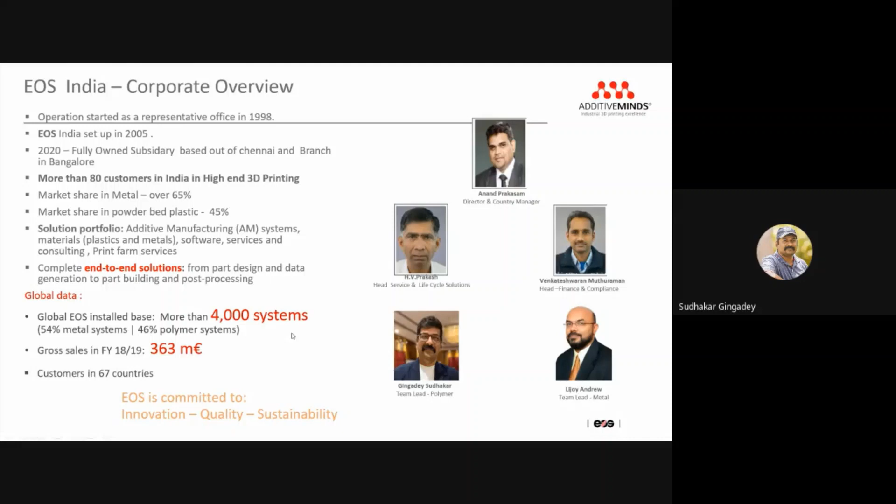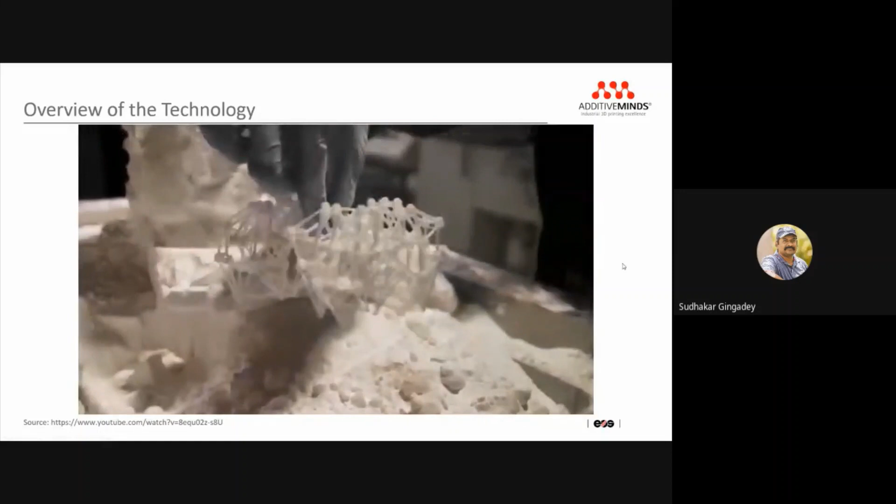So just to give you a small video about 3D printing, it's a small thing. I don't know whether you've seen these systems videos earlier. It is done as a layer by layer method. I think there are a few sessions from now, earlier sessions you must have had about what 3D printing is and how it's done, so I don't want to take you into those areas, just to show you how this works.

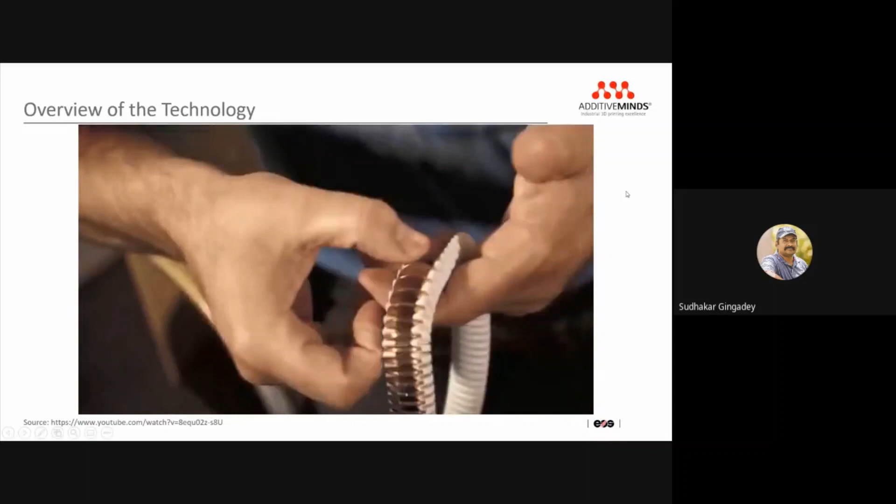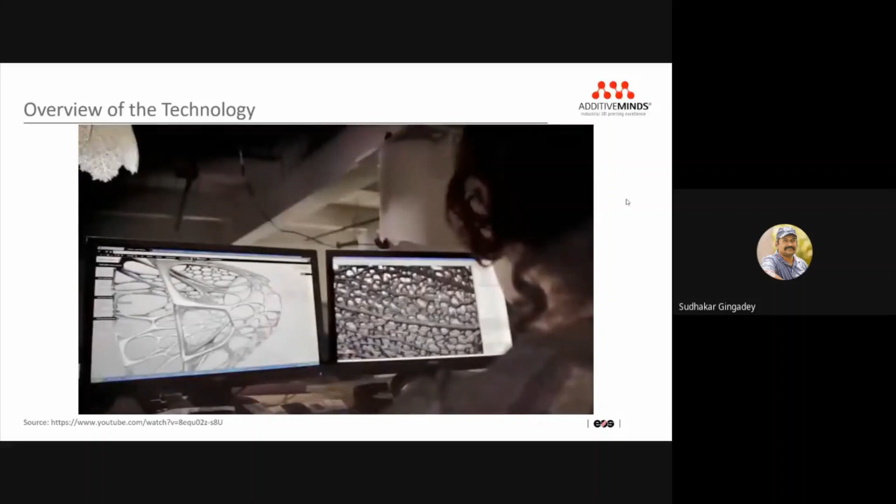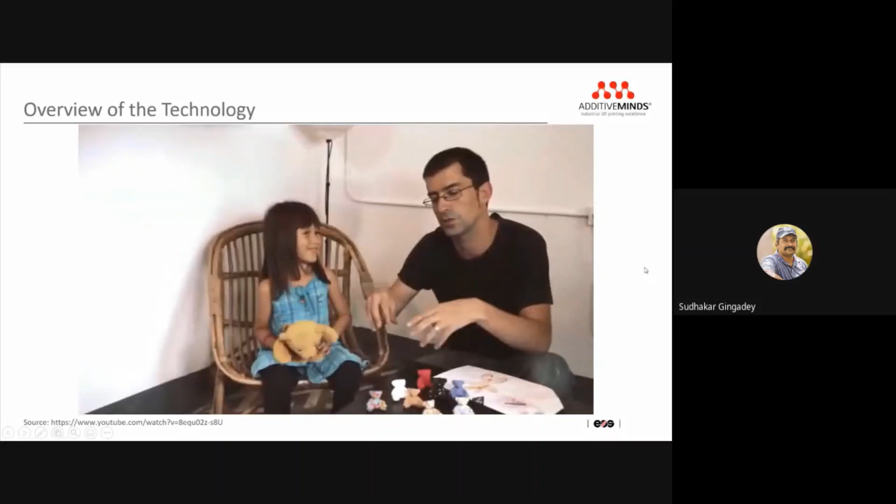It is something like designs which are not possible with conventional methods can be done with this. The design freedom is so high that whatever you finally have in your mind and you design it, you can just print it and get the 3D model intact. So there are no design constraints for the designers. The designer can have whatever he has in mind, and however small the issues, he can sort them out and print them. So here it is free of design.

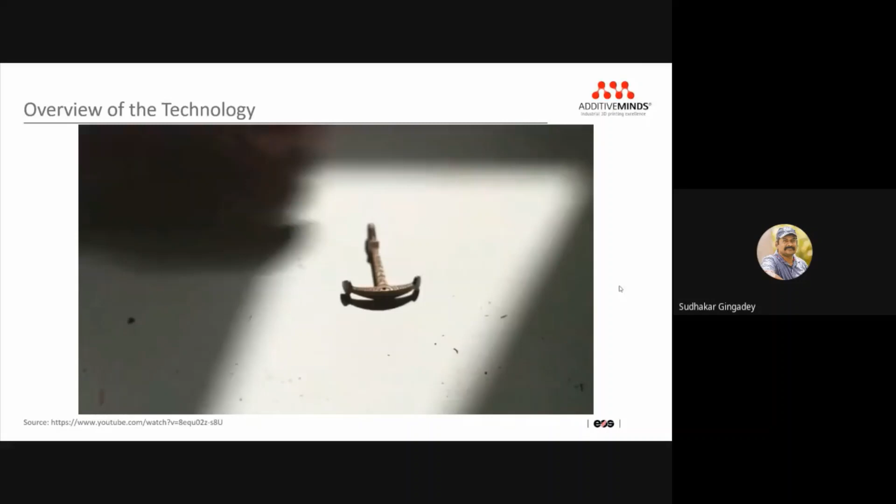That is something which is a stronger point that 3D printing has. So with that note, I hope everyone knows about 3D printing. I don't want to get into too much of that, what is 3D printing, all that stuff. So coming into today's topic, part screening and DFAM, or it's called design for additive manufacturing.

So for this, what is the application that you need to have? For example, why do we need this? Basically, what does part screening or DFAM look like? So it is basically, you have a car. In the car, there are so many parts out there. So we need to know which of these parts will be good enough for additive manufacturing.

There are so many parts in that - machine parts, casted parts, formed parts, plastic parts, metal parts, rubber parts. There are so many things in that. So out of so many thousands of parts, how do we identify what parts would be best suitable for additive manufacturing?

Okay, it doesn't only stop there. You need to know what the focus area is to understand what parts you need to bring in. It's not that alone - you also have to give some value addition to that. That means you need to understand what possibilities it can have, and then how to improve them. For example, you can improve the process, improve the assembly, improve the design. So there are so many things that you can improve, and all that has to be done.

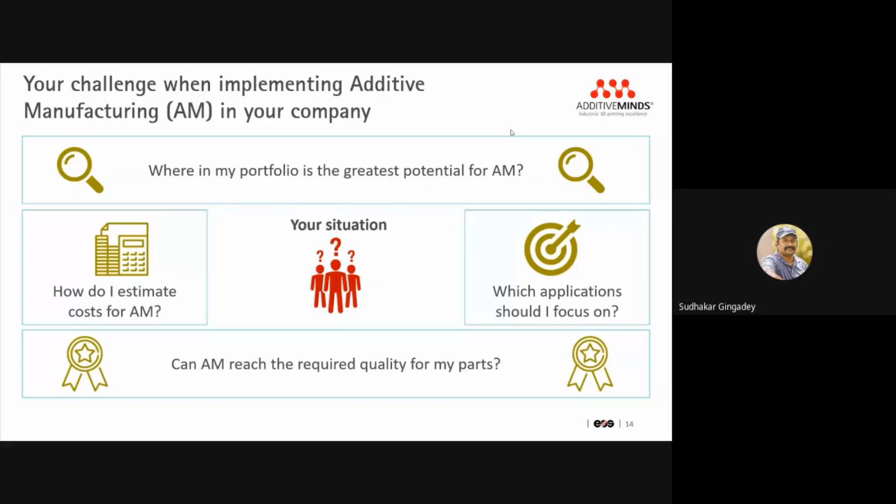The quality issues are being resolved, and the major thing is they are getting the parts at a high quality. Can additive manufacturing give that kind of quality? So these are all the challenges that you are going to face.

So how to implement or how to get optimal results? This is where we have something called the part screening and DFAM course, which is actually a 4-day program, but we're giving you a snapshot within 1 to 1.5 hours. We have a program wherein we'll have a set of people, bring in the parts, explain the concept, and then work with you. It's kind of a workshop, more of an interactive session.

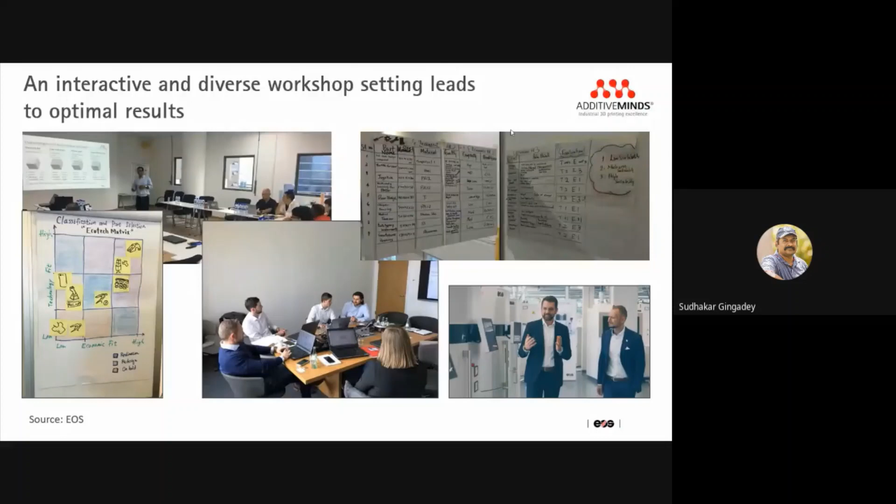So how will this session or workshop work? What are the major things that will be covered? There are two questions in front of us.

One is: what is the application that I have to use? Like, for example, metal or polymer, or rubber material, or casting. What is that application we have to find? The second question is to develop your application - how to improve, or what is the value add that I'm going to get from those parts which I have identified. There are steps you can do, which is a 3-step process.

The first step is basically part screening. The second step is DFAM, and the final is part printing of the part. So it's just 3 steps, and you can get to know what the final product is going to be.

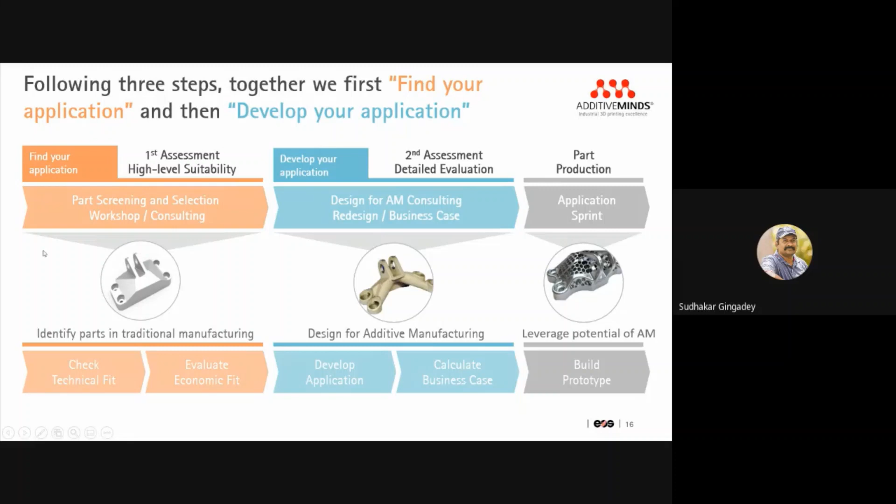Let's take the first step, which is the part screening and selection process. Here you can see there are 2 more things drilled down: the technical fit and the economical fit. What is the technical fit?

We are going one step further, trying to see what part screening we are going to use to select a part. For example, I've taken a steering wheel in my hand. So what am I going to do with that? How do I make sure that steering wheel is a good part for additive manufacturing, or is it good for conventional manufacturing?

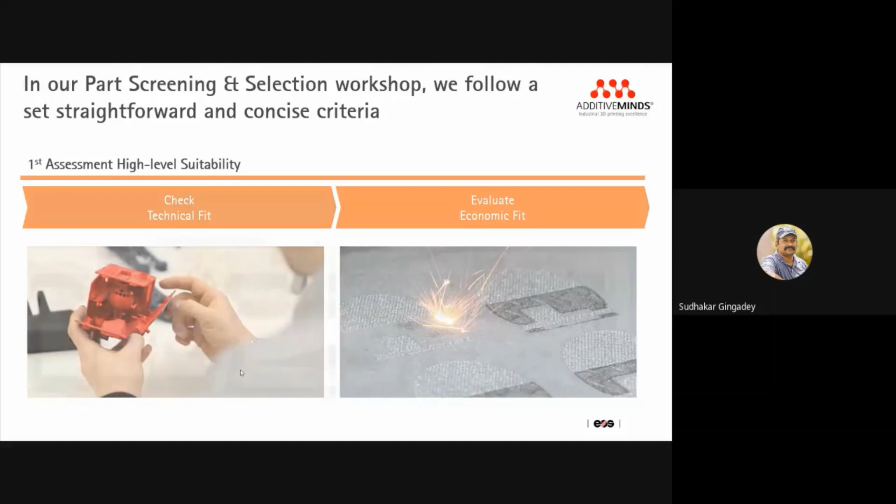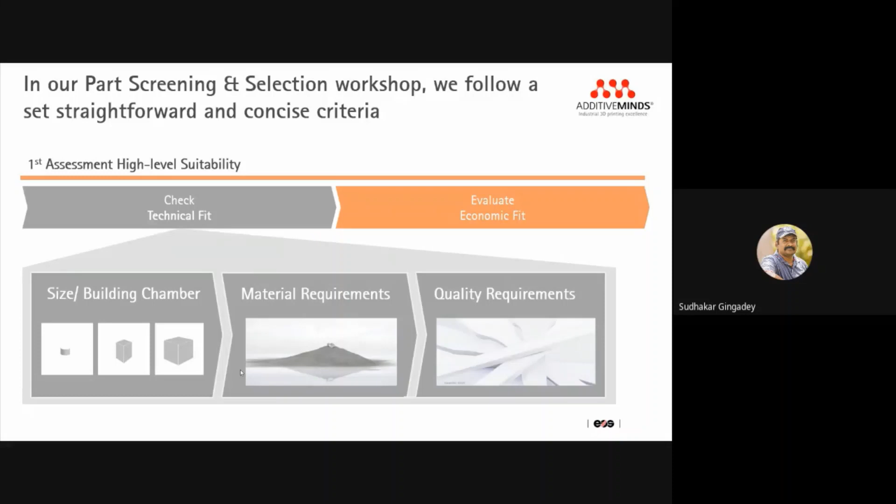Let us check the technical side. The technical side basically has the major concepts of size, material, and quality requirement needed for it to fit into a car. Size matters here - let's take the reason being size first.

What is the evaluation for economical fit? What is the evaluation criteria? On the economical side, you have complexity, cost per part - how much it's going to be costing me - and what is the value add that we are going to give to this part. So these are the 6 items we'll be talking about in part screening.

Let's take the first one, which is called technical fit. In technical fit there are three things: size, material, and quality. Here are three different machines available for size. You can also have other bigger machines, but let's look at the size. The buildable size here is 200 by 250 by 330 - this is the size of this machine where you can build parts.

Likewise, this is a bigger one, and this is much bigger, where you can do large parts up to about 700 mm. In this one, 500 is basically a production machine, so let's park that for now. But with these three machines, what is the size of the part?

A steering wheel is majorly about, say, a 300 mm diameter. So it will best suit in this segment, but you can still get the part printed out in this machine. So size, as a criteria for the part - yes, it can be printed.

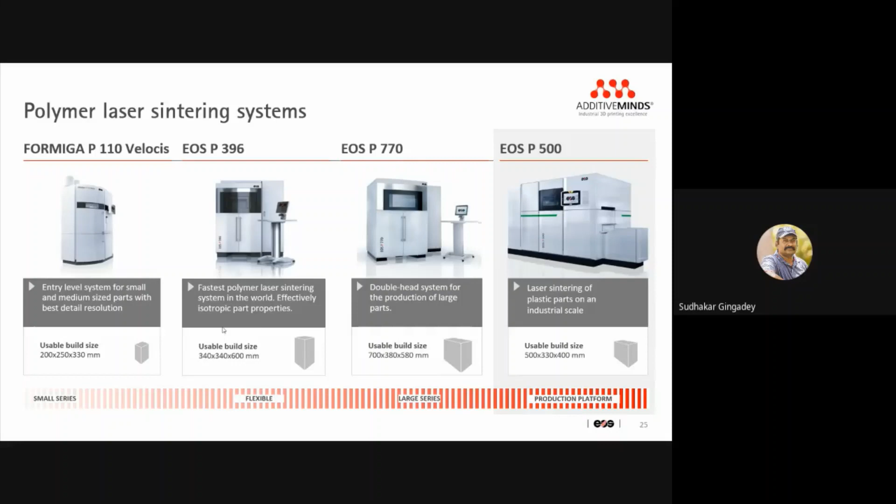Likewise, we can go into the metal side also. Again, in metal, you can see there are size constraints of about 250 by 250 by 325, and something called a 400 cube. So this is the size you need to know that the industry can produce and give to you.

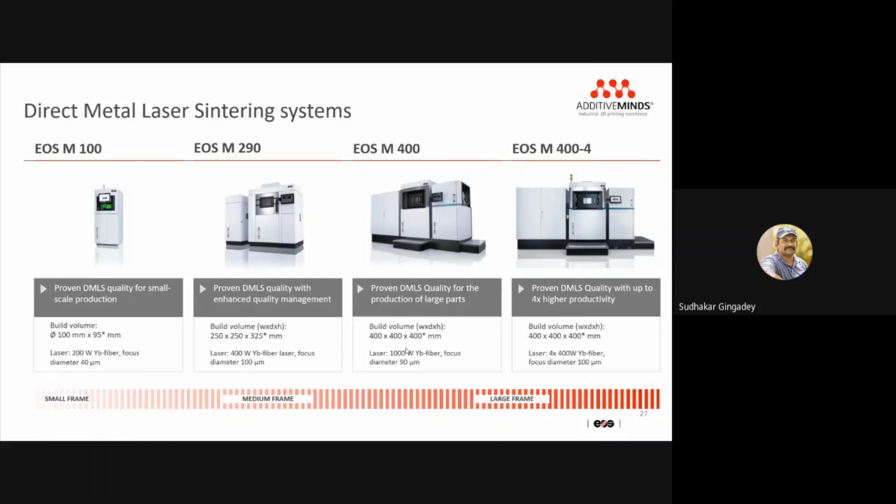Okay, then we came up with the materials also. Is there any difference between the polymer and metal? Yes, there are a lot of differences. Basically, polymer is a warm process, but metal is a cold process. Again, the laser type is totally different. This is a carbon dioxide laser. This is a fiber laser.

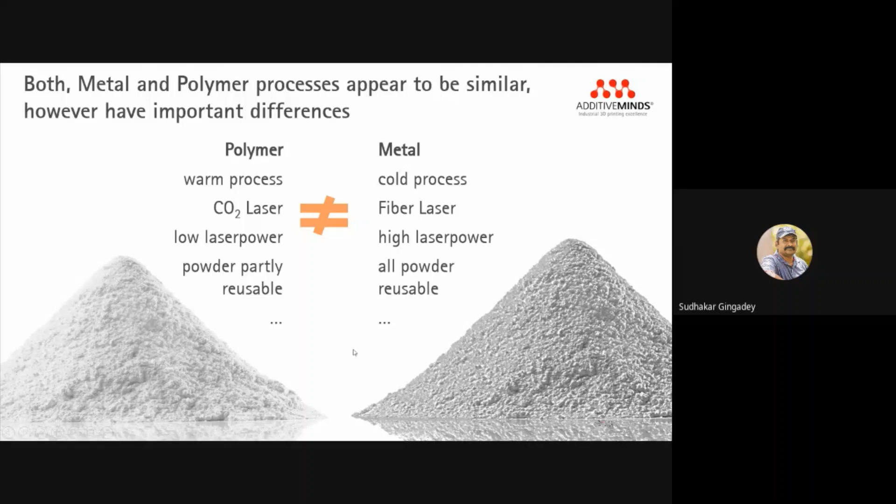So here the speed, the power is very low. This is about a 70 watt laser. This is a 400 watt laser. So likewise, there are a lot of differentiations even in polymer and metal. So you have to take that also into account when you are selecting the machine.

Then we'll just move to the next one, which is called the material requirement. So first we saw the size. Now we are seeing the material. So there are two ways. Again, I'm showing you both polymer and metal because you can have a very good comparison, because I don't know what the requirement is, whether it's going to be a polymer or a metal. So here, what are the materials that are available? We need to know whether these materials are readily available or we have to develop them.

Say, for example, you have a titanium material and you are doing some kind of space research work, and they need some composite based on titanium that they want separately. In that case, it is not readily available on the shelf, but it has to be processed. But if you are going to go in for a normal titanium, then you can directly get it. The material is available directly in-house.

So likewise for the polymer, for example, normally we use ABS material. Here we say that ABS is almost equivalent to what's called polyamide, which has basically the same characteristics as an ABS material. So if you have any composites, we also need to make sure that those composites are developed on that particular material. On the polymer side, there are so many materials available with EOS currently in the market.

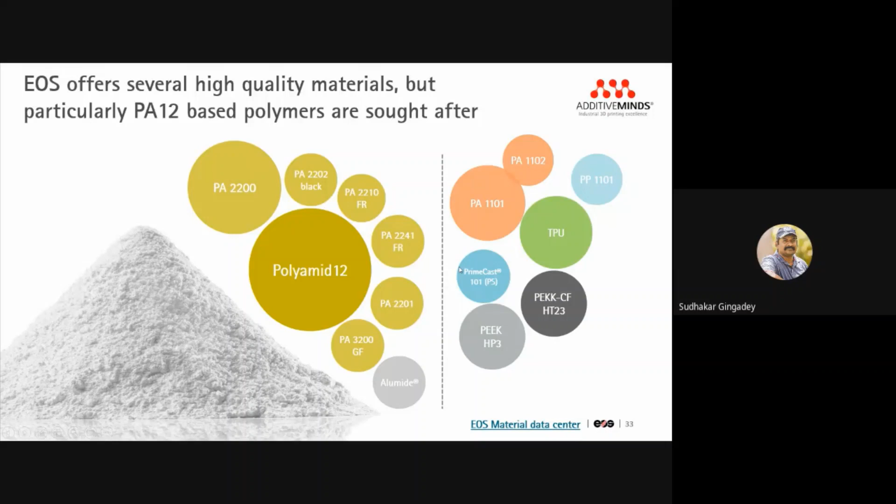So you have the nylon 12 material, the nylon 11 material, then you have the rubber materials. Then there are high temperature materials, which are PEEK and PEKK, called polyether ether ketone and polyether ketone ketone. There is another material called PrimeCast, which is basically for casting applications. So similarly, you can also see what kind of application it is.

It can be prototypes, whether it is going to have an industry standard or is it going to be a fixture. So these are the areas. If you are in a car, for example, it's going to be something like a hand-holding device, like your gear shift rod, and you have a polymer part on top of it. So this is something that you can design.

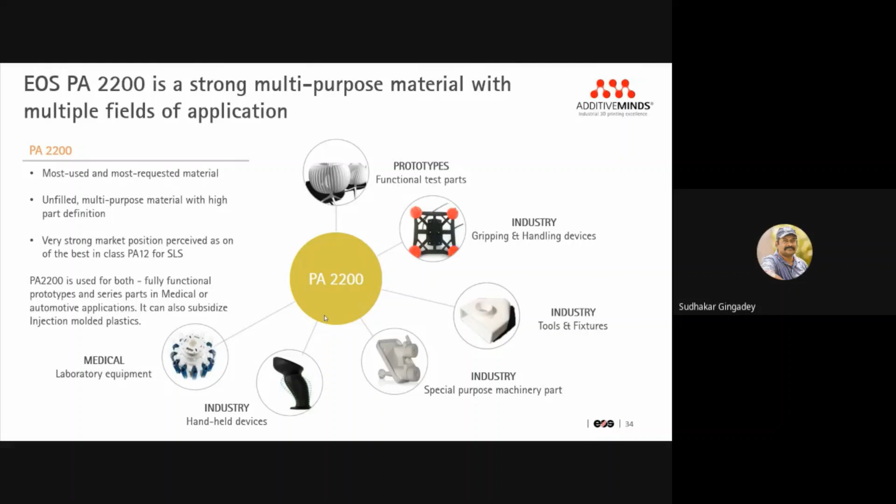So the manufacturing of that can be directly on a PA material itself. You don't have to have a metal system there. You can go for a polymer. This reduces the cost also. Likewise, you can also use a PA11 material, which has different applications, like eyewear or electronics, where you have the electrical and electronics casings, and also consumer goods, like your helmet industry.

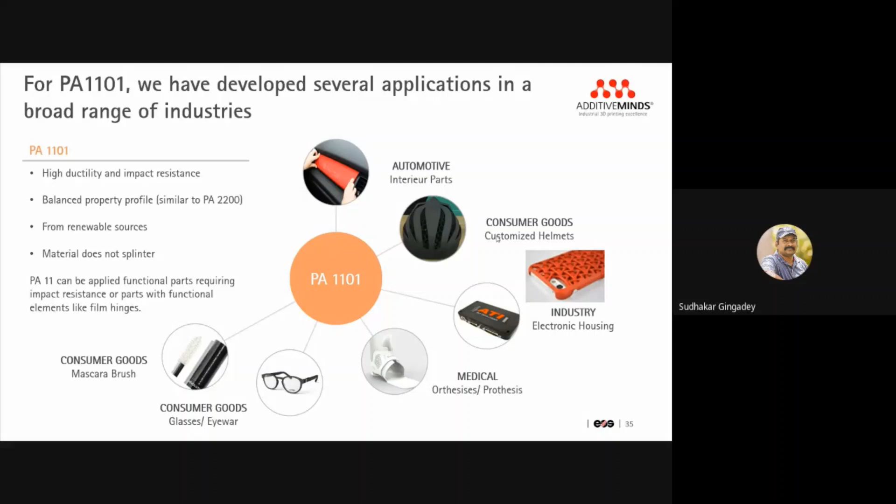So this is where you need to know what kind of material is going to help which kind of application. Then coming to the metal side, there are the base metals like aluminum, stainless steel, maraging steel, and titanium. These are the base materials you have, based on the applications, whether it's automotive, aerospace, general engineering and food sector, or tooling.

You wanted to have tooling or injection mold inserts, because we do have a material for injection molding also. Likewise titanium is for automotive, aerospace and medical. There is cobalt chrome, which is for medical, and nickel alloys for high temperature, where you have turbine parts. And there are other materials such as gold, silver and platinum.

These are materials which we have, but we don't use much. All these materials are in-house, directly available on your table, and you can use them, or if you need something separate, then you have to develop them. So you have to check this also. We saw the size, then whether the materials are in-house and readily available or we have to develop them. The third criterion is the quality requirement.

What is the quality requirement? What properties does it need? What is my elongation at break, Young's modulus, all that. Then the geometry and the tolerance level. What is my tolerance, the surface finish, the Ra value of the surface? Should it be a mirror finish or rough? For example, for an injection mold it should be a mirror finish, but for medical a rough finish is needed for osseointegration.

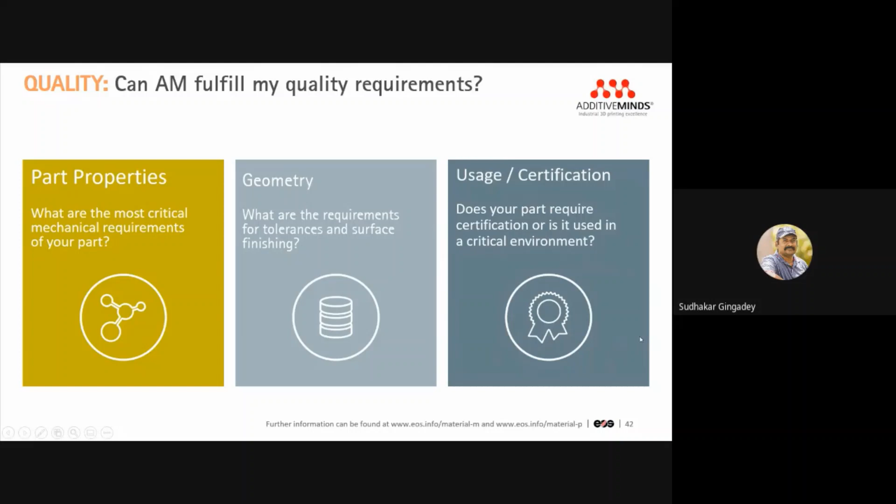Then whether it needs certification. In aerospace, if the part is flying, stringent testing and certification need to be done. If you are going in for medical implants, for example a knee or hip implant, they need standard certification, from the FDA. So you need to check whether it is required or not. These are some of the properties.

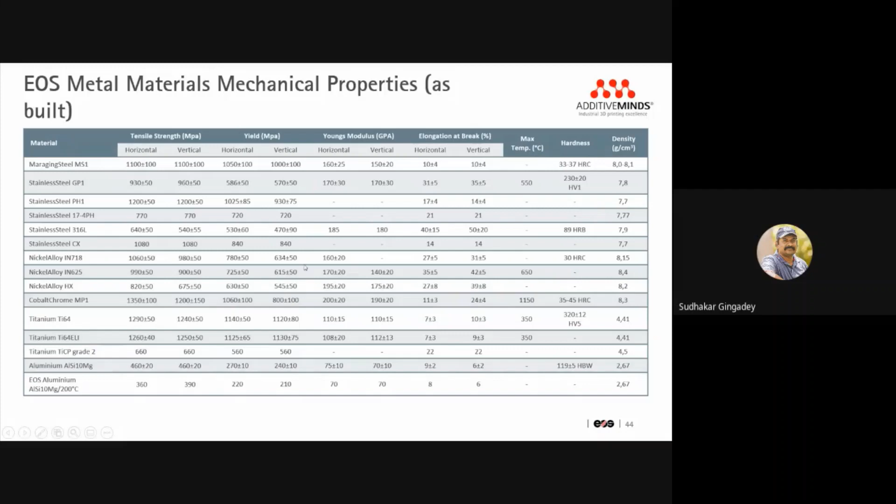Different materials have different mechanical properties. You have to check whether they suit your requirement. If not, you have to develop the process parameters for that material so that it meets those properties. Similarly for plastic, it's the same. All the plastics which I showed have the mechanical properties directly.

Then comes the quality. With all these mechanical properties, what quality am I going to get? What is the base? Metal parts can't be made like in a CNC machine or lathe, where you give a billet and just machine it. In additive manufacturing, metal parts have to be held on the base plate with supports, because of very high energy. Titanium, for example, melts at more than 1600 degrees centigrade.

When it melts and cools down, a lot of stress develops, and the parts will try to come out or start distorting or bending. To avoid that, we need good support structures to hold them. In polymer it is totally different. You don't have support structures, so you can stack one over the other in X and Y and another layer in the Z direction. Stacking is not possible on the metal side, but it is on the polymer side.

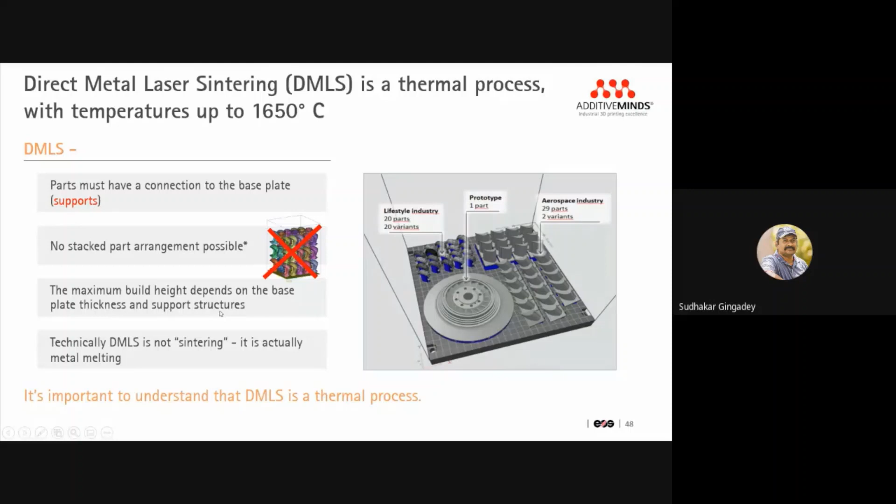And the support structure. For metal, wherever there is an overhang you need supports built, because the part cannot hold itself at such high temperature and will start to bend. To keep the part as it is, you create the support structure so it holds the part in that position.

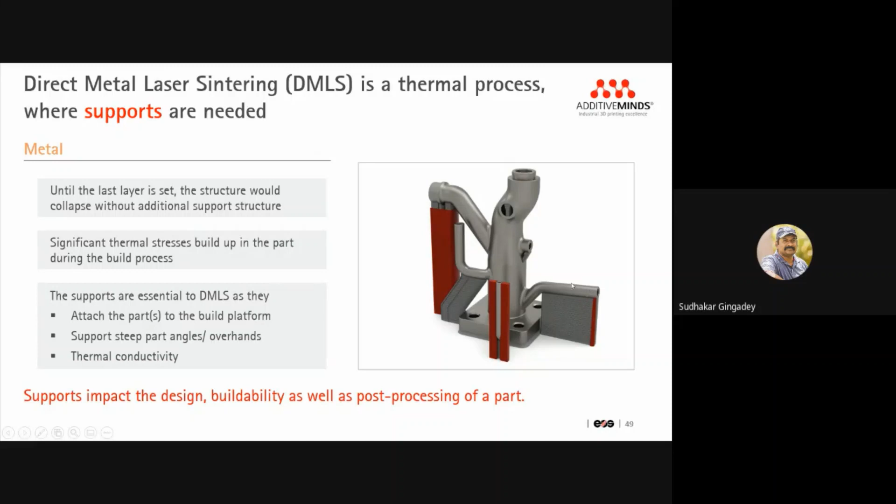So there's one more thing: you have to remove the supports. Once you do this part, you have to remove them. This was the part which was built along with the support, and the supports have to be removed. You can see that the supports are removed, but internally you have this part.

After that, you need to post-process it. So what is that post-processing activity? You need to know that, and also make sure that the quality is not compromised. After removing all the support, what is the quality that I'm going to get, and how am I going to achieve the quality which is required by the industry? That is something that we need to check.

Then the part quality also depends on the orientation. For example, if the part is like this, it has a different support structure. If the part is horizontal, then there is a different support structure. When you build this, you can see here there is a step defect, because it is a layer by layer way of manufacturing. As you know, 3D printing is a layer by layer technology, so you can see that the layers are formed.

This should not form, because then the surface is lost, the quality is lost. So I should make sure that the part orientation is at such an angle that I get a smooth part, a smooth surface finish, so that I don't increase the Ra value. So part orientation also plays a major role.

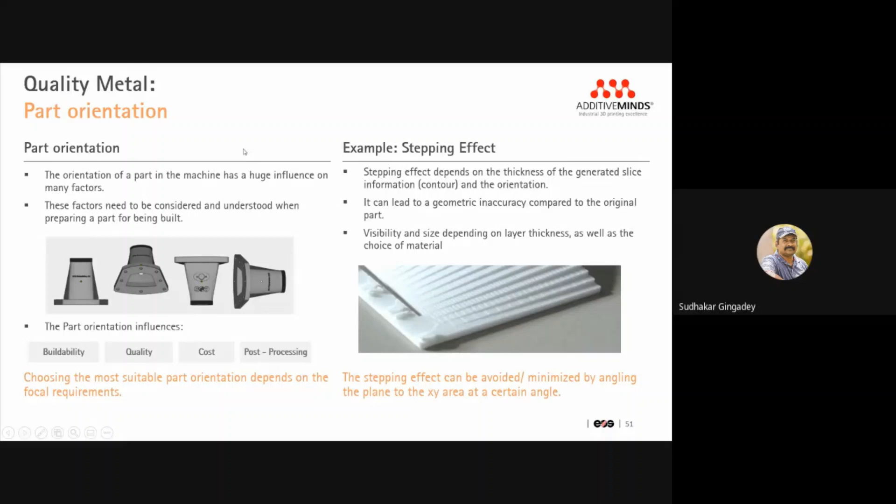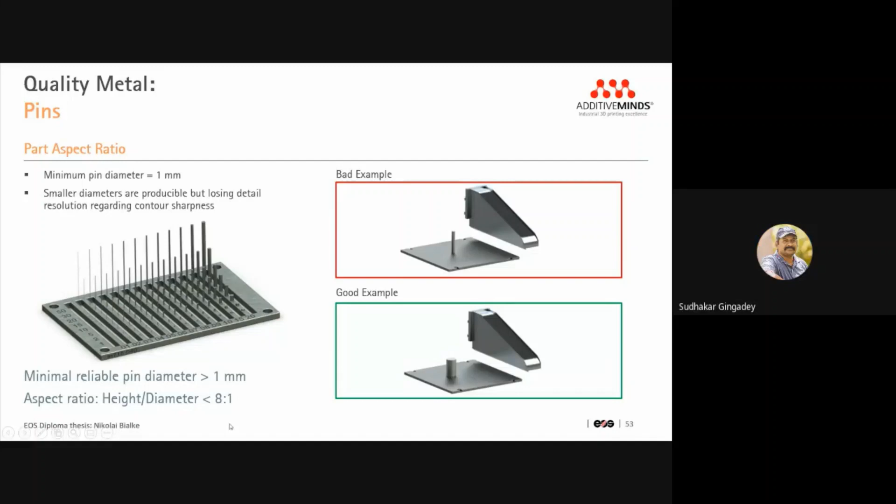Then aspect ratio. This is one more very important thing. If you have a 1 mm dia rod, how high I can build is 8 mm. If you are going to build 16 mm, heat dissipation cannot happen properly, and when the powder is spread, this pin can be pushed. So there is a ratio of 8:1, which means if you have a 2 mm dia, then you can go up to 16 mm. That is the 8:1 ratio that you have to maintain.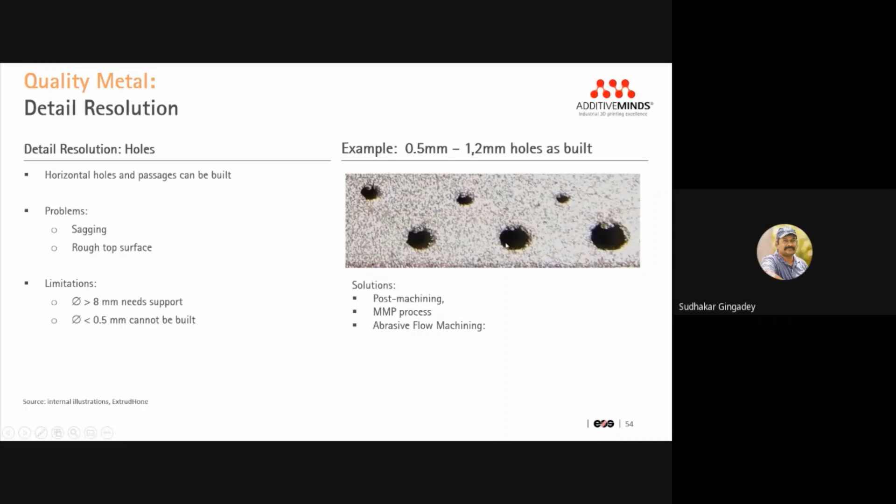Then on holes, if the holes are smaller and the part is thick, then there will be some kind of an effect like this. You need to re-drill the hole again, so this is again a post-processing activity. These are the quality issues which you have to keep in mind when you are building the part, redesigning the part, or selecting the part.

Now that we have done the technical fit, let us see what's there on the economical fit.

Till now, any questions or anything? Are you guys following me? Because I know it's a bit of a new concept. Are you guys with me on the session? Any questions? Participants, if you have any query, you can unmute yourself and ask, or put it in the chat box, not a problem. No, sir, no questions. They don't have any queries. Okay, fine. Right.

So let us go to the economic side of the part. There are three major things on the economic side: complexity, cost per part, and value add. Let us see the first, complexity. Here the question is how to handle this complexity.

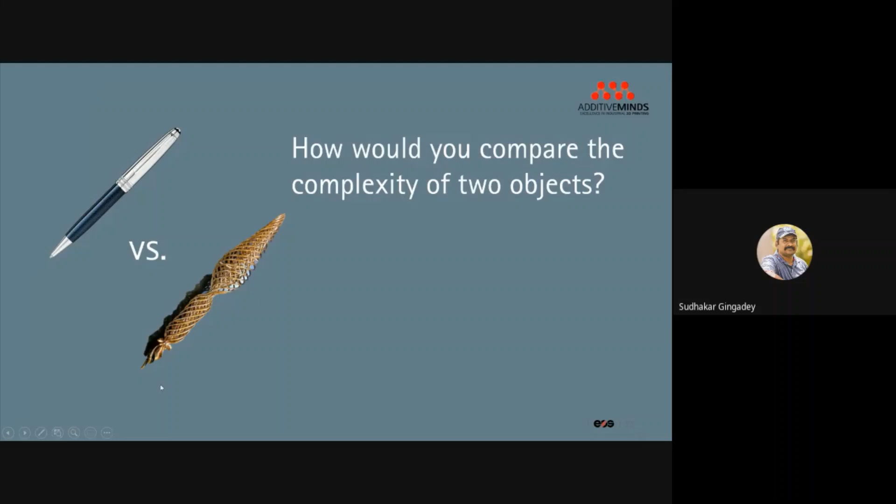So this is what we mean by complexity. Complexity means the part cannot be manufactured through a conventional method. It depends on the complexity, and there are a lot of other things. The height of complexity is this kind of pen, which is impossible to produce with the conventional method.

So here you have a geometric complexity or a manufacturing complexity. To explain, this is six-sided, so there are only six surfaces. This is very simple: I can take a billet, machine all six surfaces, finish. But if I have 54 holes here, there are so many surfaces, and the complexity moves from low to medium because of all the surfaces inside these small holes.

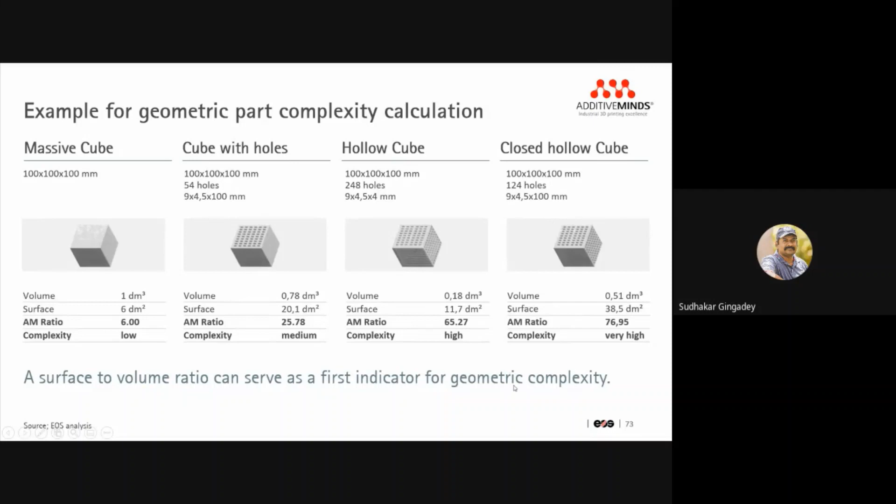Then if I have a hollow cube, the surface to volume ratio is very high, so the complexity goes higher. And if I have more than 124 holes, here 248, and it is a closed hollow, the surface to volume ratio is much higher still. Inside it is closed, so the complexity is very, very high. This is called geometrical complexity.

To compare, in injection molding, this is a manufacturing complexity. The earlier one was geometric, and this is manufacturing. For an injection mold, you need the idea, then a prototype, then a mold, then a pilot series, then improve the mold based on feedback from the pilot series, and then you go for part production.

But in additive manufacturing, you have an idea, you do a prototype, and don't do a mold at all. You do a pilot series directly, because there is no need to create a mold, which involves very much cost. Creating a mold is a huge cost, and then improving the mold again and again involves more cost. In additive manufacturing you just do a pilot series, get the feedback, and then go for series production.

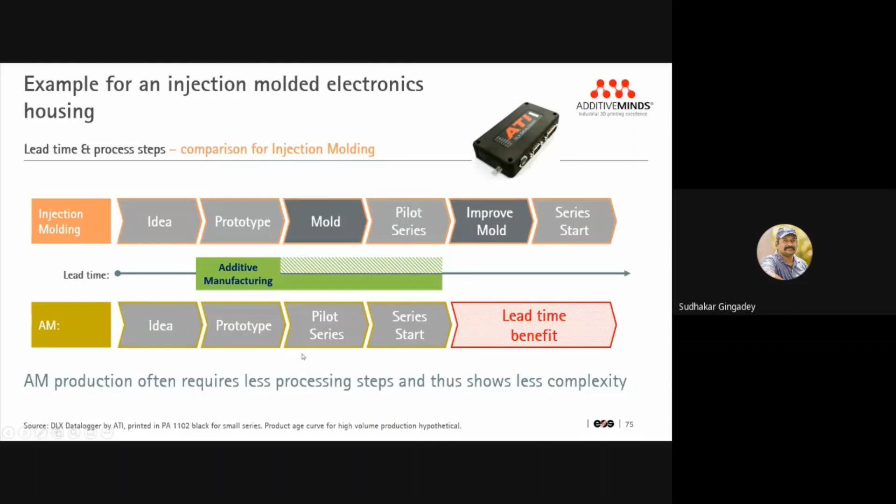If it is a few thousands, or if it's going in lakhs, then you can go for a mold. So there is a benefit: you can be in the market well in advance compared to the normal conventional method. This is the manufacturing complexity. The geometry complexity and the manufacturing complexity have been covered, so I don't want to go over them again.

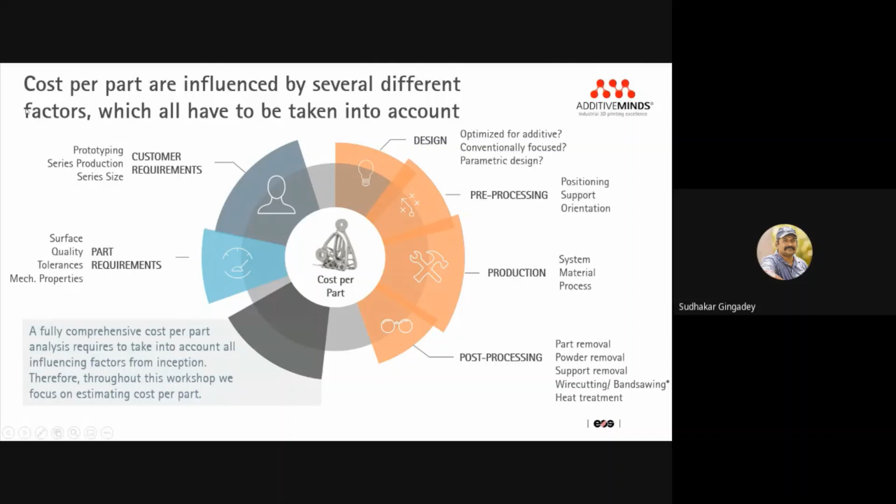Then we go for cost per part. There are different costs involved: design cost and pre-processing cost, then production cost, basically the system, material, and processes, then post-processing, basically part removal, powder, raw material and all this stuff. You have to take everything into account to do the cost per part.

So you have to take the data preparation, then you have to take the part which is being produced, then the post processing, whatever it is, which is basically a heat treatment to improve your hardness, or if you want to improve the surface, then you have a quality. So all this comes into the cost per part calculation.

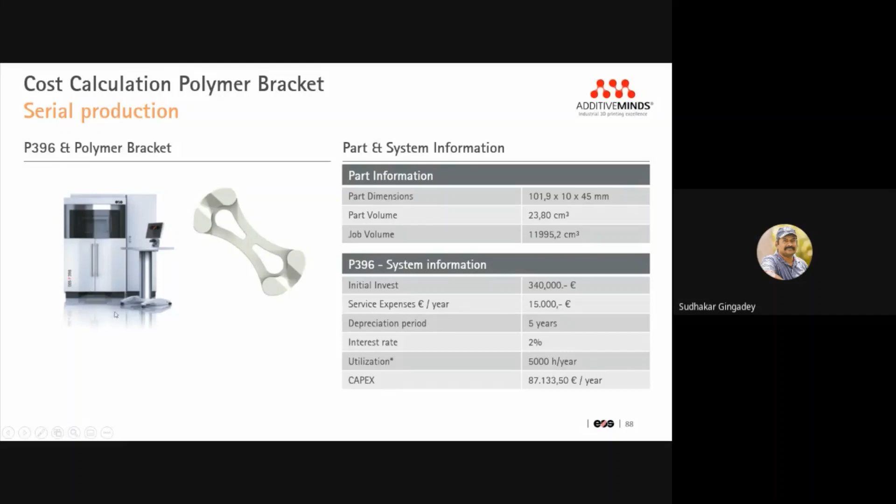So how much we are trying to build, how many numbers can be built in one single go. That means about 504 brackets of this kind can be built in one single process. If it is going for about 40 hours, in 40 hours you can get around 500 components. That means this one is a small batch production.

So if I need, say, about 5,000 parts, for example, you can get this within a month of builds, you can get 5,000 parts, and you can go to the market, give it in the market, so that they can use it and give you feedback. So this is something like a small batch production.

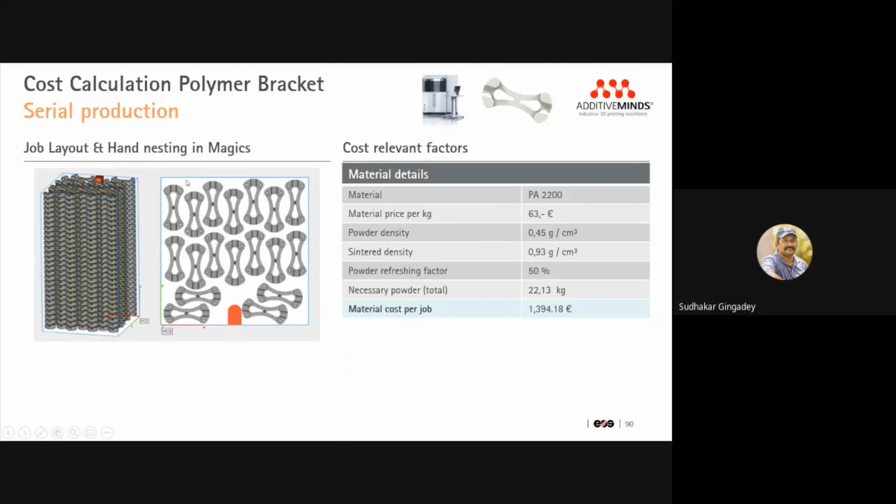So as I said, then we take the system cost alone, like how we had taken the machine, the service, everything. So the machine cost comes to this much. Then you also have to add the material cost. What is the material that I have to use? How much is the material to build this particular part, that is the 500 pieces? Okay, so taking all that into account, how am I going to give a value add?

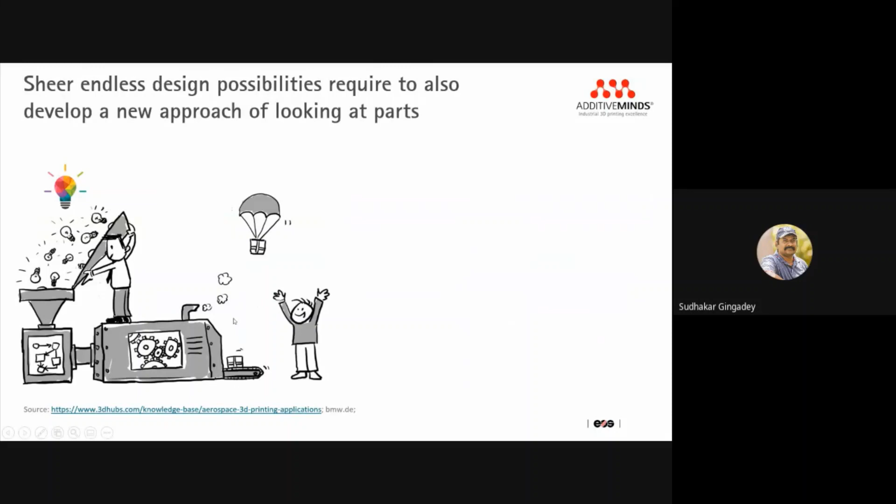So if I'm taking one part, say for example this part, I can redesign it like this, or maybe like this. If I have a sheet metal component, this is a sheet metal assembly. This is another part, basically a sheet metal punch or a die. So instead, we can directly design this one this way. Or if I'm taking a part like this, I can have n number of designs like this. So my design thinking or my freedom is very high.

So how do I bring it? How do I need to give the value, or where do I need to bring in these value adds? So I need to bring the complexity here. Then I can bring in the weight. There I can get a value add. Then the functional integration. You can see that this is 100% plastic, built as one single part. Then it can also be customized.

For example, a very good example is on the medical side, where you have polio-affected people, or braces, or for example, you have this orthosis. When you have a fracture of a hand, normally they use this POP bandage. So instead, you can go for a plastic orthosis. So those are all customizable.

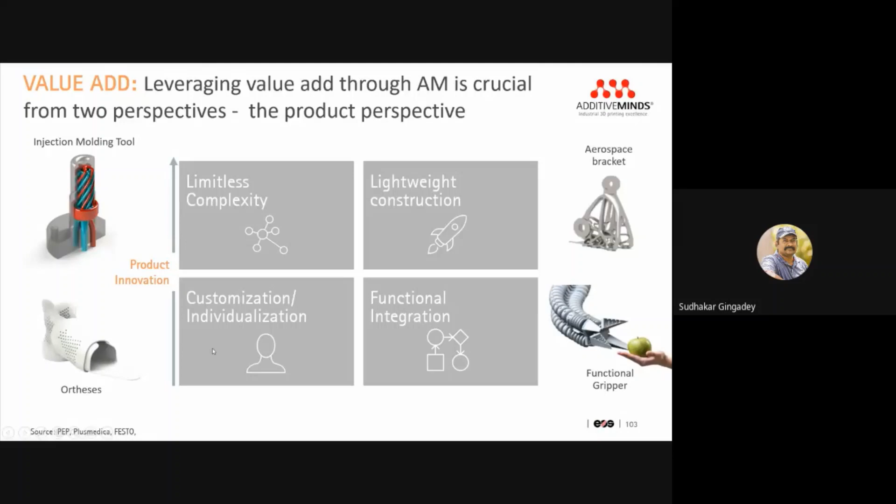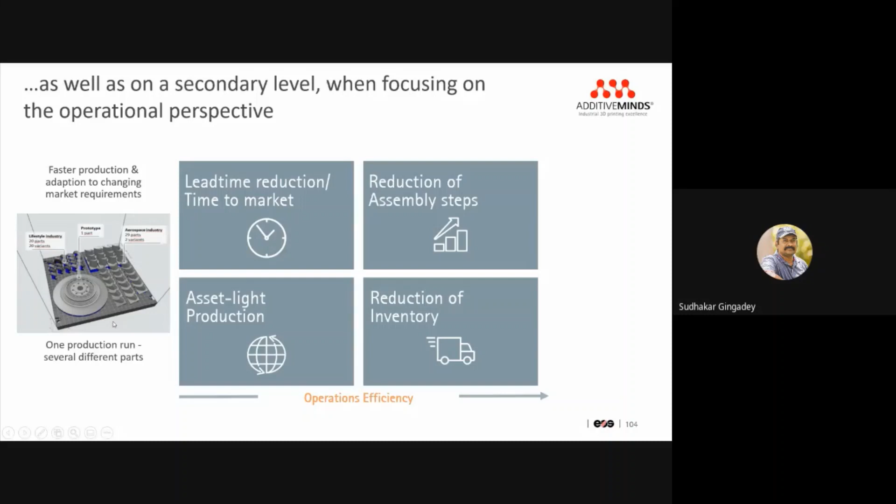Then you have asset-light production. Basically you can use it like a digital inventory, where you don't have to have a physical inventory. So if this part is required, you can have it in a digital form. Whenever there is a requirement, you can build it, print it, and then supply it to the customer. So that is the inventory side.

So having all these, you can say what is the value add I'm going to give. So if you're taking a normal additive manufacturing part, initially it will be very high. The initial investment is high.

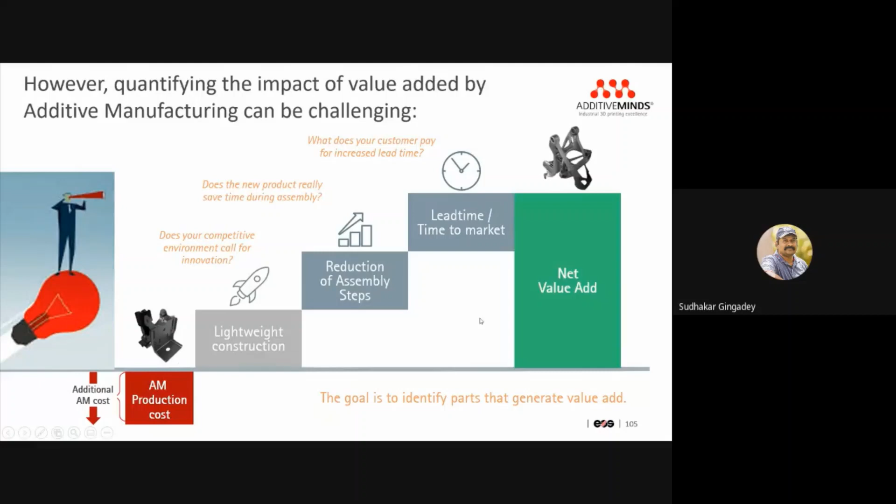So if you're taking this as your zero, the initial production cost in additive manufacturing is going to be higher. Then how are you going to give that value add? By using lightweight construction, the assembly comes down, the lead time comes down. So this is the value add that we can give.

So let us take this joystick as an example, and see what is the technical fit. So this is a smaller part, it's a very small part. So it can be produced in the size of the machine what we saw. Then it is ABS material - I told PA12 nylon 12 is equivalent to a nylon material.

Then the quality - how good is this quality? We are able to achieve the smoothness and also the tolerances. Then it is biocompatible - the material what we have is biocompatible. The reason why it needs to be biocompatible is because we will be holding it in our hand, so it should not irritate the skin when you are holding it for more than 6 or 7 hours. It should not irritate. So those quality information also can be captured on the certification.

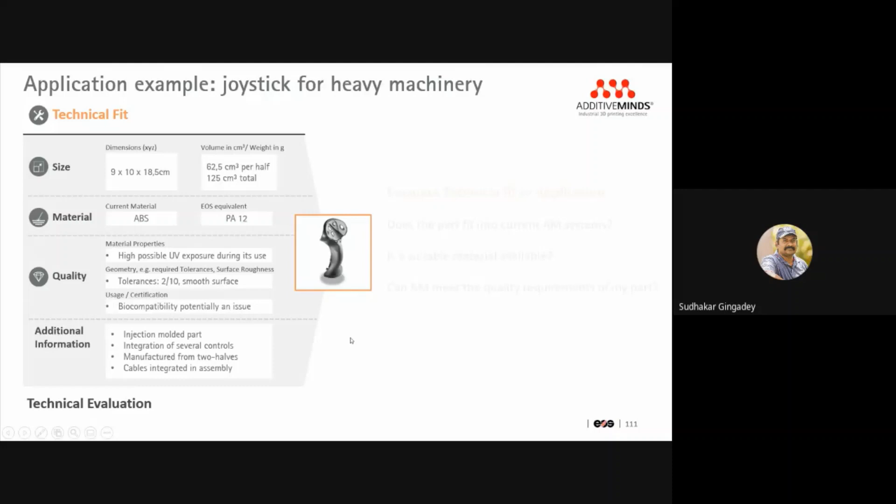Then the additional thing that we are giving is, it is basically an injection molded part, but what we are giving is we can directly print this part. This can also be printed like how you do it in injection molding - you can do it in two halves, and also the assembly can be done. So this is something like the technical fit. Now if you see the evaluation, this is at a higher level, meaning this is a very good part for additive manufacturing.

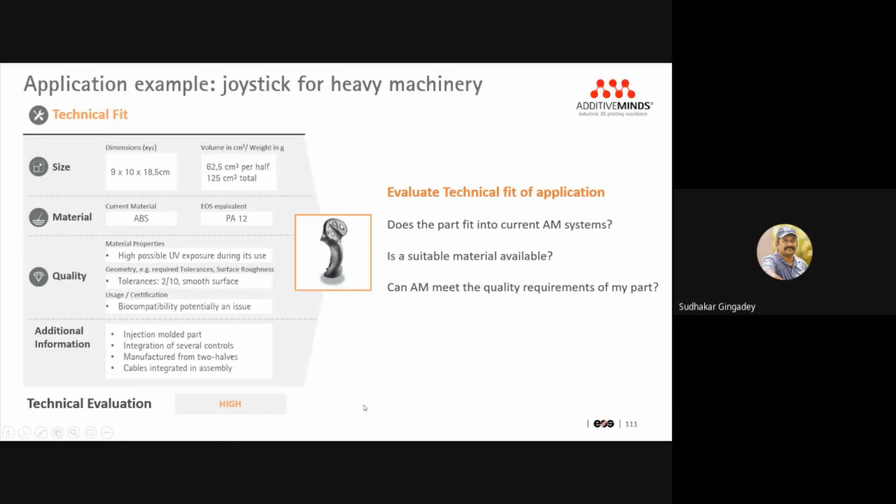Let us take the economical side. With the economical side, if you say the complexity, it is at a medium level with the geometric, but manufacturing it is also at a medium level - not much, because it's not a very complex part.

So the cost, if you see for 1,000 pieces per annum, the cost in a conventional method is 35 euros. But in additive manufacturing, you can say it is 10 euros more. The cost what you are giving is more, but still, how are we going to give a value add here? What is that?

So you can customize this. Basically, normally what we do is we have a standard size - small, medium, large - but here you can customize it to the specific users. So you can use it, you can have kits, you can have impressions, and you can customize them.

Then you can also have toolless manufacturing - that means you don't need a mold at all. You can say you have 1,000 pieces, or about 500 pieces, then you can directly build in one or two builds, then just supply it to the customer. So there is toolless manufacturing, you don't need a mold at all.

Then you can also add textures - it doesn't need to be smooth. For example, you need to have grippers here, so the grippers can be redesigned, and it can be different - for example, 5 lots can be of one design, the second 5 lots can be of a different design. But if you want to do this conventionally, you have to have 2 different molds. Here it is not like that - one build you can change the design, another one you can change the texture. So that is the value add that you are going to give.

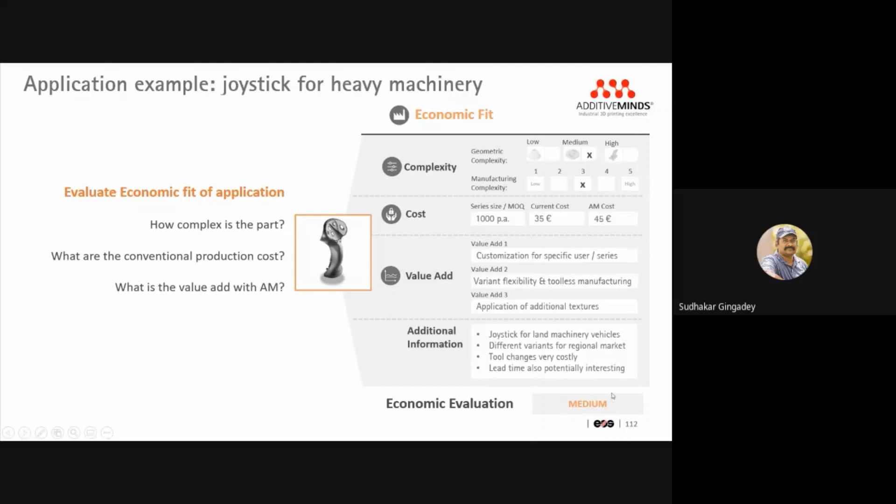What we say high, low, medium, it's in the medium. So let us take this and put it into something called a matrix. Let us do a matrix where you have low on the economic side and high on the economic side. Then if you see on the technical side, you have a low and a high.

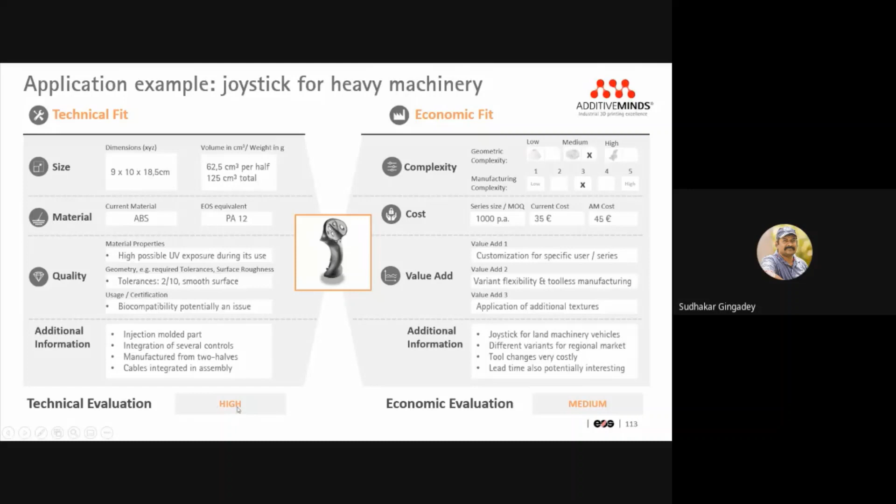So how do we do this? Let us take the same example from earlier. You can see that technically it is high and economically it is at medium. So our part is technically high, economically medium, it goes into this.

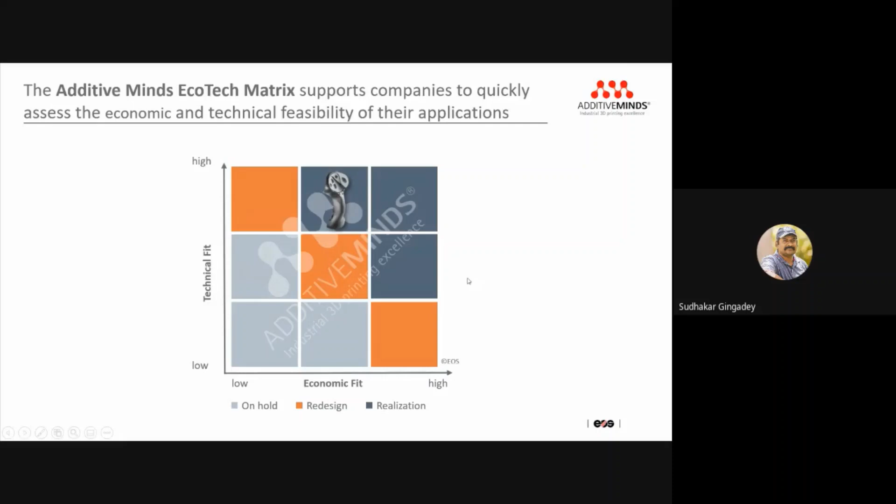Likewise, from the car you can pick parts one by one and place them in the matrix with this scorecard to see where each falls. By this you can create a chart with your parts showing which is feasible, which is not feasible, and which can be moved to a higher feasibility level so that part can become an additive manufactured part.

This is the first level. This is what we have learned - how to select a part from a car or any assembly, and what part would go for additive manufacturing. Till now, any questions? Because we'll go for the next one.

I know this subject is a bit dry, but still I'm doing my best to make sure I'm giving good, full information.

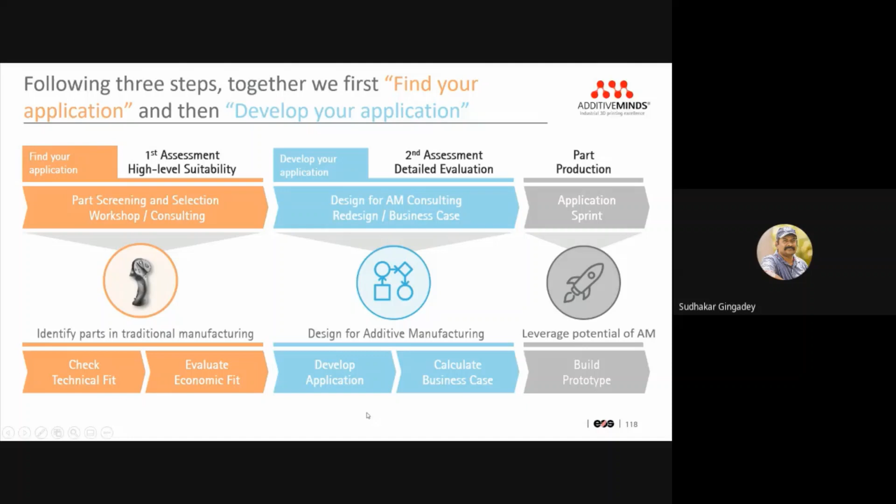If we don't have questions, let us get into the design for additive manufacturing side. I'm just taking one example because I don't want to take too many things. Let us take one satellite, a full satellite. This is a big one, a very huge one, and let's see how we are going to do the part screening.

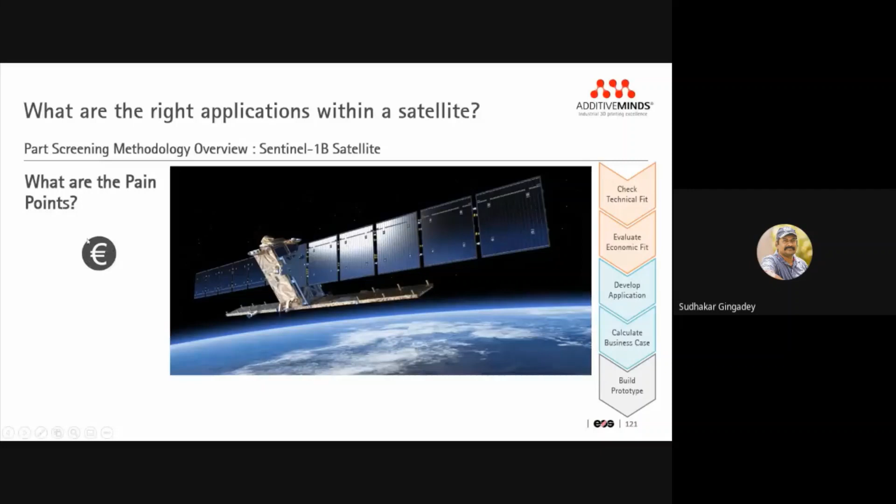Can I use this part screening on this? Let us see the size - this much big size I cannot do, I can't do this. So then what we do is look at the material, what materials are available for this. We have identified a few materials on these parts. Then, what is the quality level it needs to have?

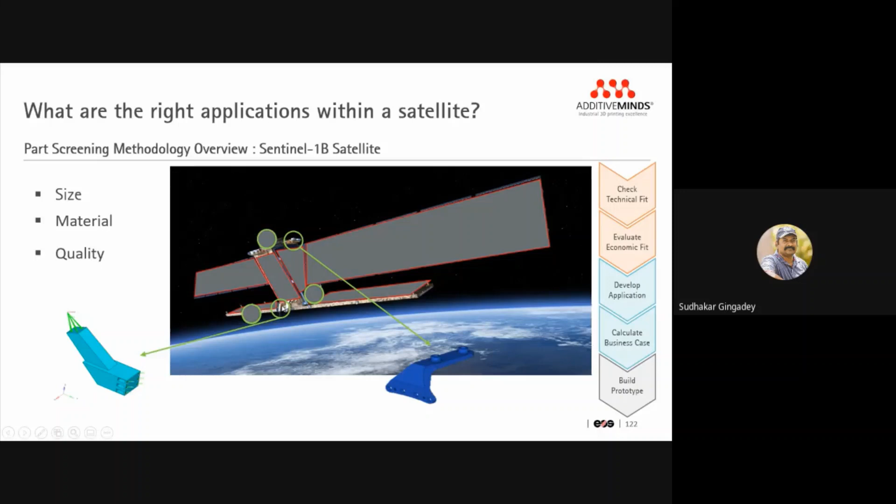So after doing whatever we did in part screening, we identified two parts, two brackets. There are two brackets which are going to hold some equipment on the satellite. Let us take one example, maybe this one. This is the actual part, what was printed, manufactured conventionally without additive manufacturing. Let us see how this is going to change.

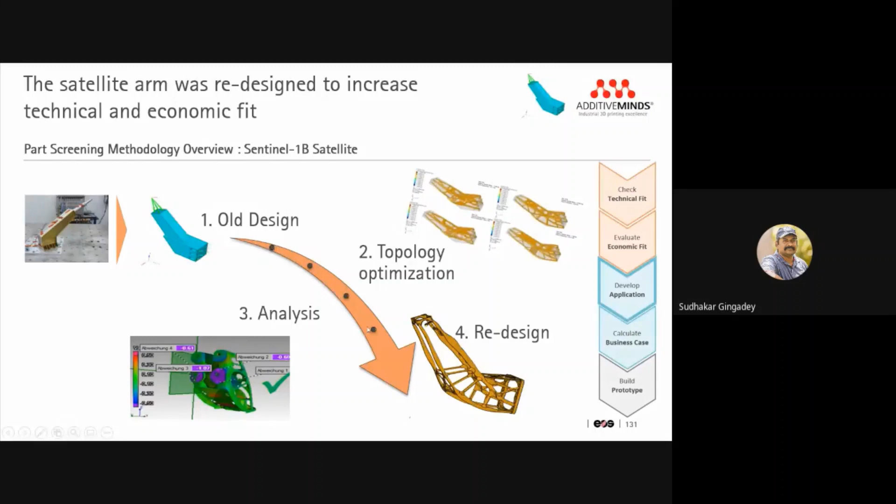So once the changes happen, you need to do an analysis on whether this part can hold that antenna or whatever is being assembled on it. So the analysis is done, and then you do a redesigning. This was the part, and so we have redesigned the component like this.

So what is the advantage that we are getting? We are going to give improved quality. That means it can hold a much heavier part than what it should hold earlier.

The major disadvantage here is because it is sheet metal and welding. What happens if there is an issue, this welding comes out, then the welding cannot be done back, or the repair cannot be done back, because it is in space. You can't do that, so the whole part can collapse. So you need to make sure the part quality is very good, to improve the stiffness and quality here.

Then there's also the production time. Here there is a lot of assembly, a lot of sheet metal, a lot of welding you need to do, and a lot of rivets that they have used. So all this is brought down.

That means the production time is about 50% less. Then, the weight of the whole component — here you see it's sheet metal, and here it's the same material, aluminum, and you can bring the weight down by 40%, it is lesser.

So what happens is, in space, if you want to carry 1 kg, if you're able to reduce 1 kilogram of weight by any means, that has a ripple effect on burning your fuel. Then it can increase the payload of the satellite — they can add one more small 1 kg satellite, so they can carry that also along with it to space. So this is very, very important, where weight is a very high factor for them. So the 40% weight reduction is a huge thing for them.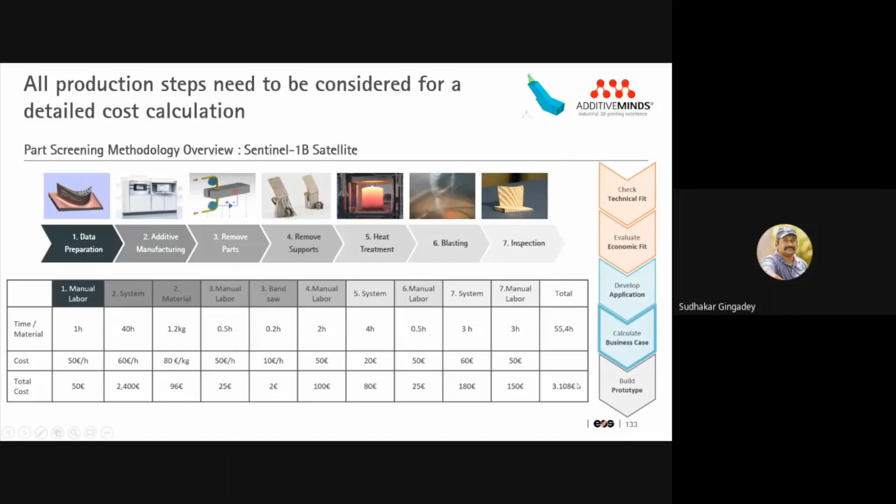If you're going for additive manufacturing, the cost is about 3,100 euros to produce this part. But conventionally it is 1,300. In additive manufacturing it's about 3,000. So that's a huge difference of 1,800 euros.

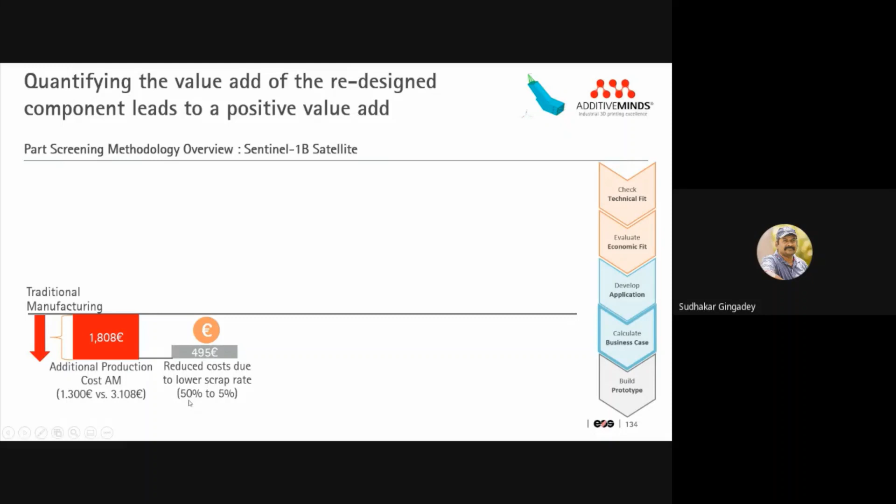So how are we going to tell the customer or give that value add? As you saw in my earlier slide, we reduce the cost by the scrap rate, because there is no scrap at all — it is all built, and the powder is also reused. Whenever you build conventionally, there is scrap which comes up, but here there is no scrap. So the scrap rate goes from 50% to 5%, and you get this much amount as your benefit.

Then we reduced a very good amount of weight, from 1.6 kgs to 940 grams. That is somewhere around 10,000 euros per kg, so you're saving somewhere around 6,600 euros — you're able to get this value. So this amount is not that big, but you can see the value add you have given here, since you can carry extra payload, which is more.

So the additional benefit is lead time and stiffness — that means it can hold a heavier part. So this is the additional value add that you are giving. If you see cost alone, there's a difference — we are at a higher rate — but when you go for other areas like weight reduction, lead time reduction, you can make the part much stronger. So that is the value add you have to give. When you are identifying a part, you also have to identify these aspects and then do it.

So this is the part exactly as it was built in 3D printing, and this is how it was assembled in the satellite.

Okay, so now let us do the same exercise for this arm also. So technically, the size is very good. Aluminum, it's a normal aluminum which is available. Then we are able to improve the quality. We are able to increase the stiffness. Then we are able to have a very good tolerance level, higher tolerance level, and the certification is not that high because it's not a functional part. It's just a bracket. So the certification is only medium. So the evaluation goes high.

Okay, let us come to the economical side. The complexity is not that big, it is on the medium side, but the cost. On a cost per part, conventionally it's very low, but in additive manufacturing it is two to three times the cost. But what value add are we giving? 40% weight reduction. So you are able to save so much cost, which is already higher than the difference. And then the scrap rate is brought down, which is an additional cost saving there.

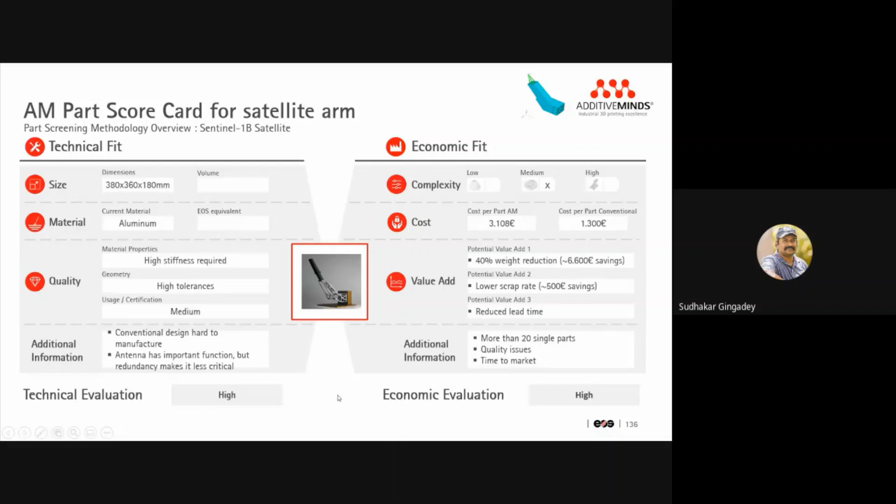Okay, so likewise, I'll show you another segment, which is for Airbus. It's a hydraulic component. Most people must know this manifold block, which is used in hydraulics for the front or back movement, for example in your JCB where the arm moves up, down, left, right. This manifold block is similar to that. Internally, these holes are drilled very irregularly. Here there is a 90-degree turn, so there will be pressure loss at these areas. You need a smooth turn; only then will you not have pressure loss.

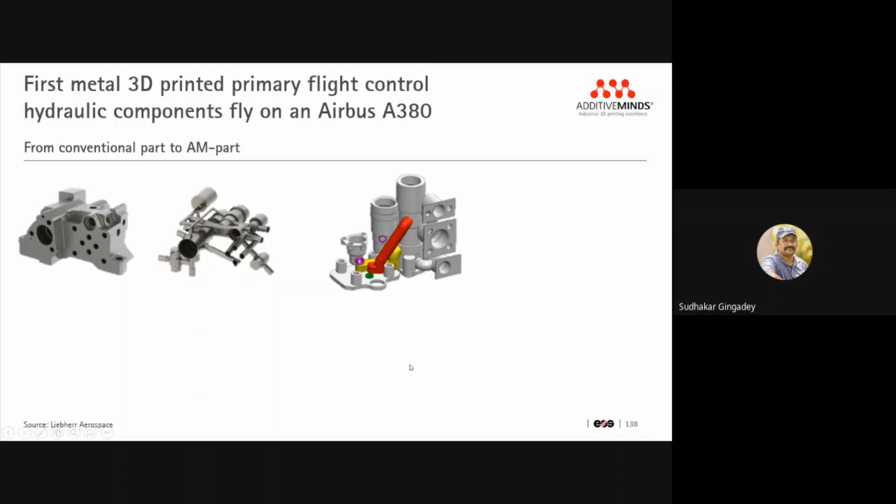So with the help of additive manufacturing, you can redesign the entire thing, something like this, with very smooth corners so that the pressure loss is minimal. The advantage is you can go to a higher pressure and you don't need so much power for the operation of that movement. So finally, the part was printed like this. This part is a bracket used when the plane lands. You can see the flaps come out on the wings. That hydraulic component is this one.

So here, what was the advantage? Compared to the conventional, the functionality is identical, and the 10 parts they had were converted into one single component, and the weight was reduced by around 35%. Regarding the certification requirement, because it's Airbus, for aerospace, the certification was much easier because it's one single part going into operation.

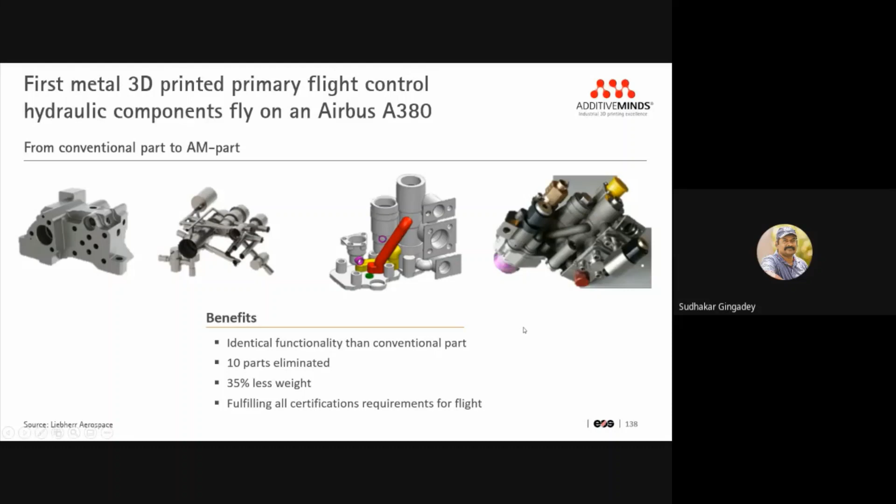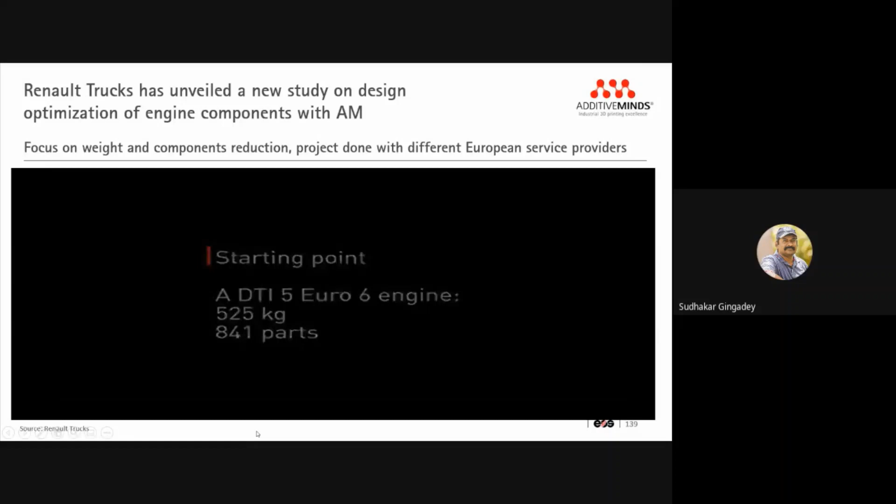So similarly, I have one more. It's just a video. It is used for a Renault truck, showing how they implemented part selection and DfAM, that's design for additive manufacturing. We have taken a full engine, and how to identify the part and how to redesign it is what this video shows. He has identified one part, an alternator bracket. We have reduced it by 18%.

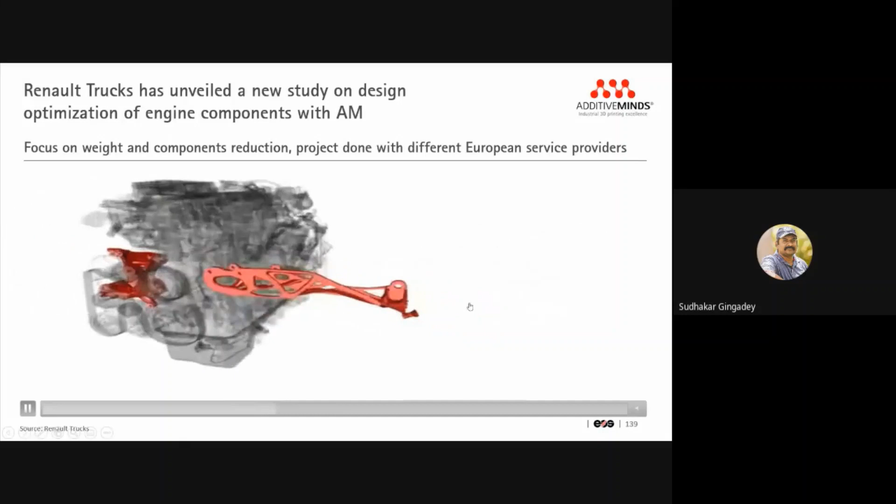Then the next part comes in. We have identified another bracket. You can see the redesigning of this. So this is a combination of part screening plus design for additive manufacturing.

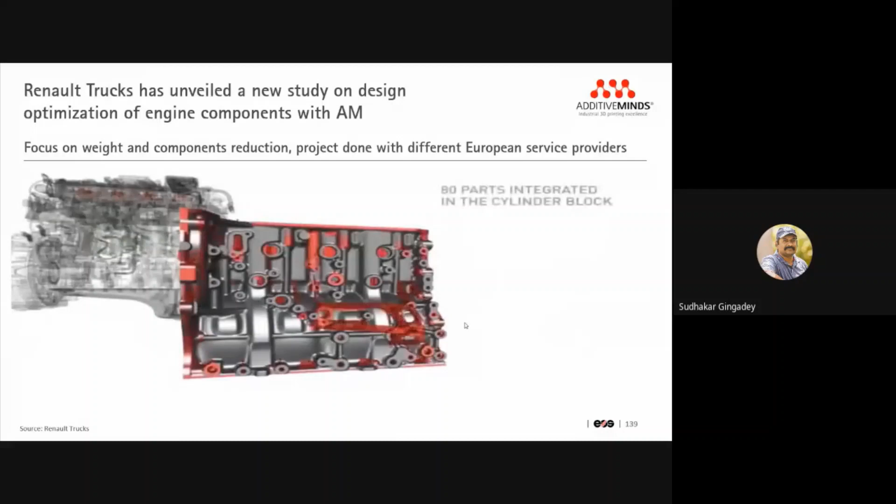So the entire engine block. Here they have 80 parts integrated as one single block. With 80 parts, there's no need for an assembly or sub-assembly line, so they have totally eliminated that. And here 45 parts, so another assembly is avoided. It has all become a single component. Overall, they have reduced somewhere around 120 kgs, and the number of components was reduced by 200.

So what happens is, if you are able to reduce a car by 120 kgs, basically the car can be much faster. So your fuel burning is lesser. So the carbon content that you are going to emit in the atmosphere is lesser. So it has a ripple effect. When you're reducing the weight, the fuel burning is less. By that, the carbon content or the carbon footprint is much lesser. So you can do it this way.

I request all the designers to have this in mind when you design new components, so that we leave a good world to the next generation. So this is one such thing which is very useful for us, to give them the free hand so that the design can happen very nicely.

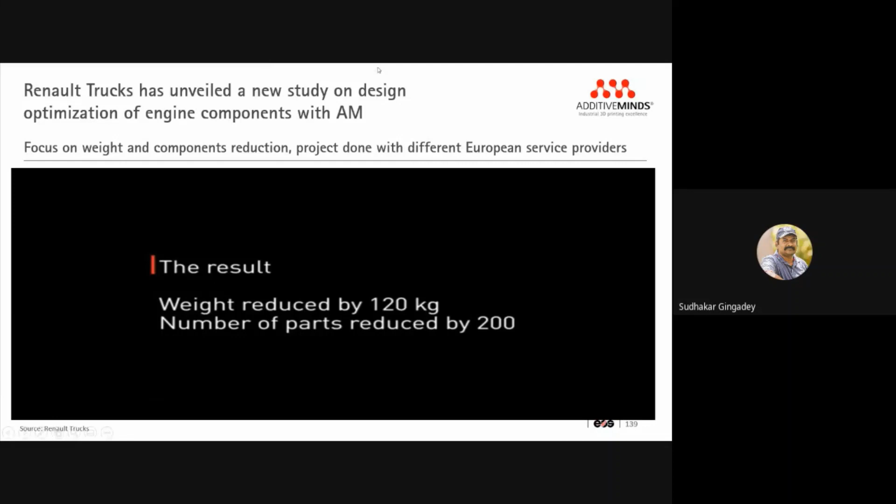So with this, I just wanted to conclude like this. This is my last slide, telling that additive manufacturing is not a replacement for conventional manufacturing. It is an enhancer; additive manufacturing enhances the conventional method of manufacturing. Wherever the conventional method of manufacturing has difficulties, additive manufacturing can help to resolve those areas, so that conventional manufacturing can enhance itself and give a better production level.

So here, if you see additive manufacturing, the more complex, the more freedom the designer has to produce the parts. Conventional manufacturing is very good, when you go for volumes also. But now there are technologies which are very advanced, and even in additive manufacturing we have systems which can do production level. That means 100,000 parts can be printed, like an injection mold.

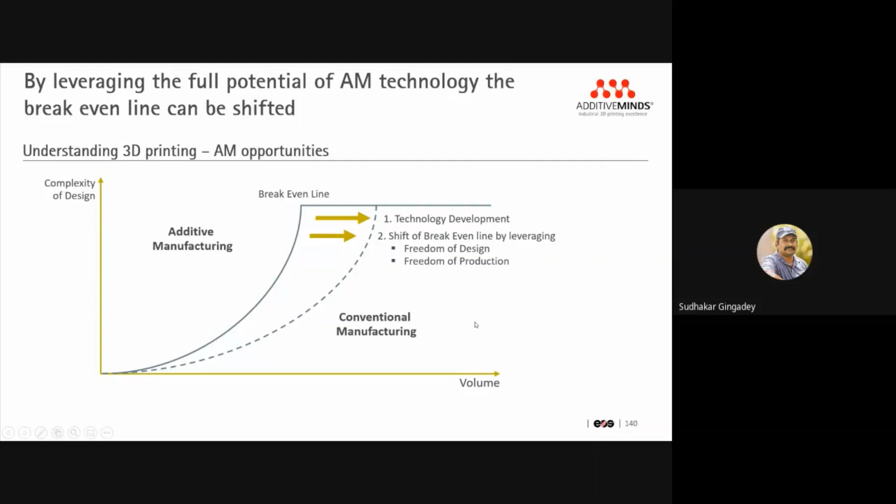So you don't need to go for molds at all. You can directly go for 1 lakh shots or 2 lakh shots; you can produce them in additive manufacturing itself. So the technology is going in that direction. With the freedom of design and freedom of production, the break even, which was earlier at a very initial stage, can now also go for production, and the conventional and additive manufacturing technologies go hand in hand so that finally we get a better part and a better environment.